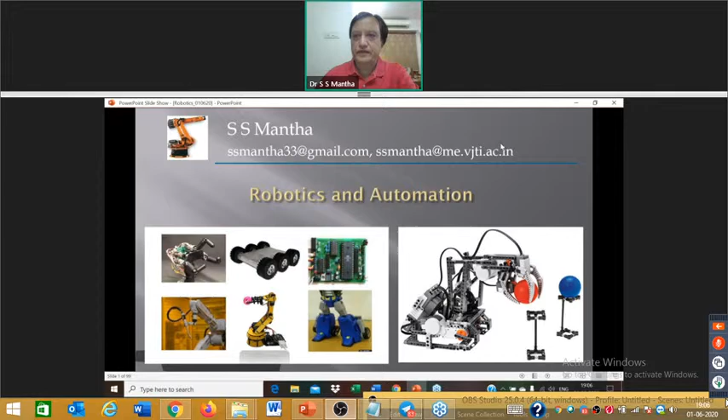What I'll do is take you through a session on robotics to try and understand what the subject is about. Today, almost everybody speaks about robotics, AI, and so on. In today's world, almost every application seems to be talking about some kind of automation. Within the industry space, automation is a generic terminology used, and robotics becomes a very significant part of today's manufacturing activities. Though I have said robotics is in reference to manufacturing, it has several other areas of application. In fact, in almost every single area you can think of, robotics has its place.

Now, what I'll be doing in this session is create a preamble to automation in order to really understand what robotics is all about. So we need to understand a little bit of what automation is. Then I'll take you through robotics, talk very briefly about how a robot is understood in terms of motion, in terms of forces, and so on, which we call kinematics and dynamics. Then I have something to inform you about control systems, which actually makes the robot do things we see in real time. And to do that, it uses several actuators and several sensors. Sensors sense an event, give a signal to the actuators, they start moving, the control systems take over, and we have a robot functioning. Subsequent to that, I'll take you through a little bit of smart robotics and mechatronics, flexible manufacturing systems, and some applications.

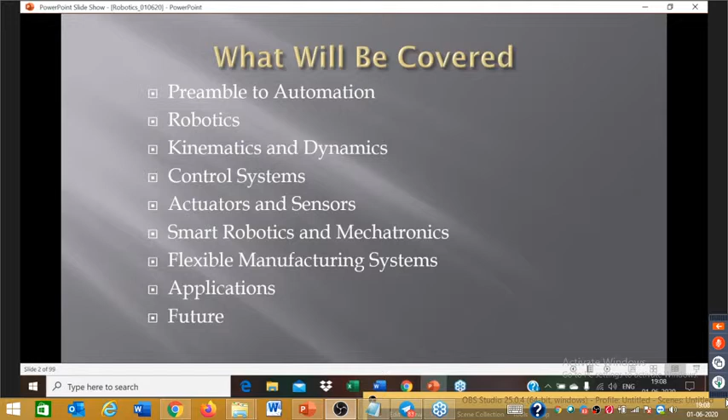So when I talk about preamble to automation, at the central part, there are production system facilities. There's product design, there's manufacturing planning, there's manufacturing control, the business functions, and all these become functional with customer orders. That's a typical manufacturing area or manufacturing space.

Now, when you come to factory operations, you deal with design, manufacturing planning, manufacturing control, and the business functions. And on the periphery, you have computer-aided design, computer-aided manufacturing, computer-aided business systems, and you also have cost estimations, part planning, numerical control, and so on.

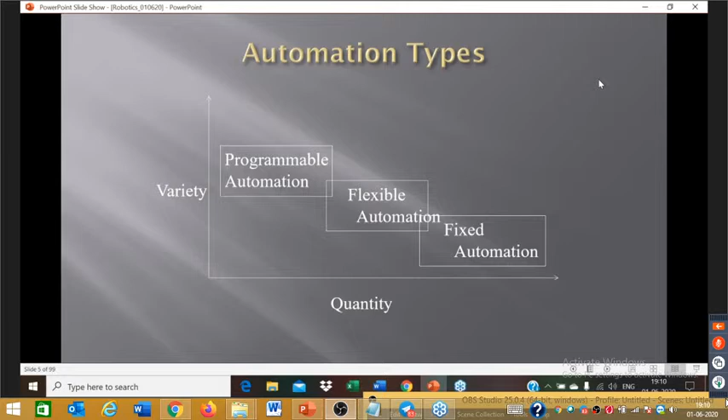Now, when we really look at the basic automation, there are three sub-areas: you have fixed automation, programmable automation, and flexible automation. These depend on the quantity you produce and the variety you have in production. When we look at fixed automation, obviously it has very high production rate. Because it has inflexible design, the variety will be very small. And between the three, fixed automation costs the least.

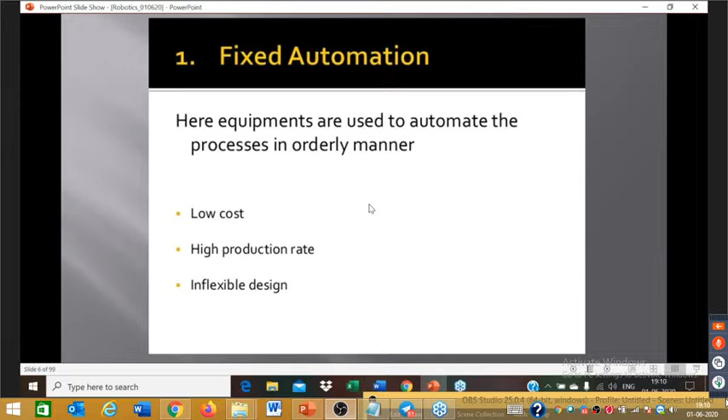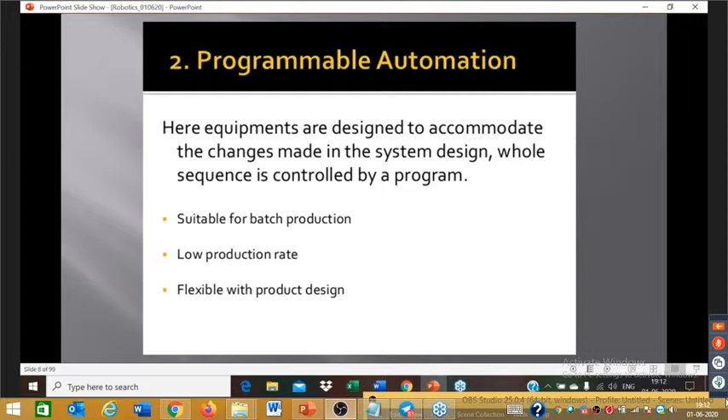Now we look at programmable automation. Here, equipment is designed to accommodate changes made in the system design. This is useful, meaning it has some capability of programming and changing the sequence of automation from fixed to something more flexible. So this is useful for batch production. It also has low production rates and is flexible with product design, meaning you can change the products and the design using programmable controllers and so on. This is a programmable automation controller. There are several kits available in the market which you program to get a certain sequence of events, giving you programmability into automation.

So there is a significant growth that is forecast for up to 2024.

The third is flexible automation. Here we have medium production rate, continuous production with variable design, which means you can keep changing the designs. A high amount of flexibility is available, but the cost factor is also very high. This is the place where you have a lot of robots and robotics and several other automation devices. That is how you get the requisite flexibility.

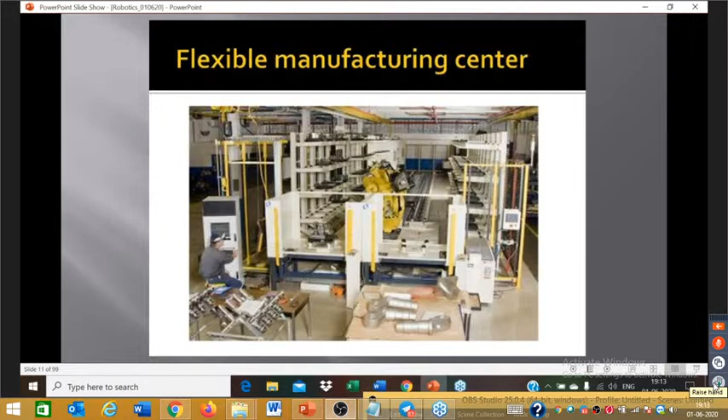Now we are looking at a flexible manufacturing center, which has several robots and so on. This is basically a continuous plant where different operations are carried out by different robots designed to do different activities or different sequence of events.

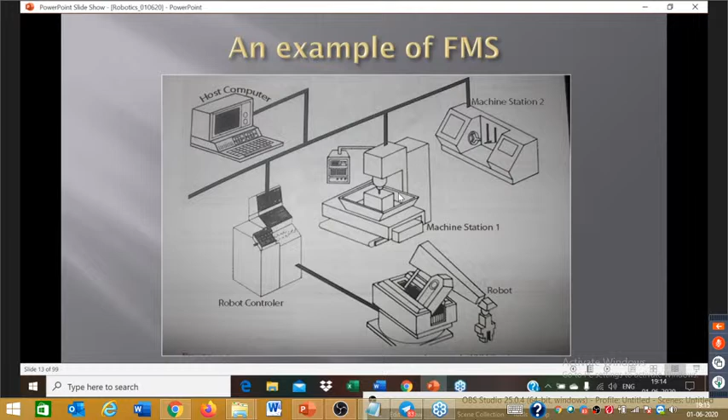So you have a fairly great amount of flexibility built into the product variety, and fairly large production volumes, but this is all dependent on the kind of costing that would be there. So this is how a flexible manufacturing system appears: there is a robo, a robo controller, and a host computer. There is machine station 1, machine station 2, and machine station n. There can be n number of machine stations.

Now, having looked at the preamble for automation and looked at robotics or robos, which are used in a typical manufacturing environment, we look at what actually a robo is.

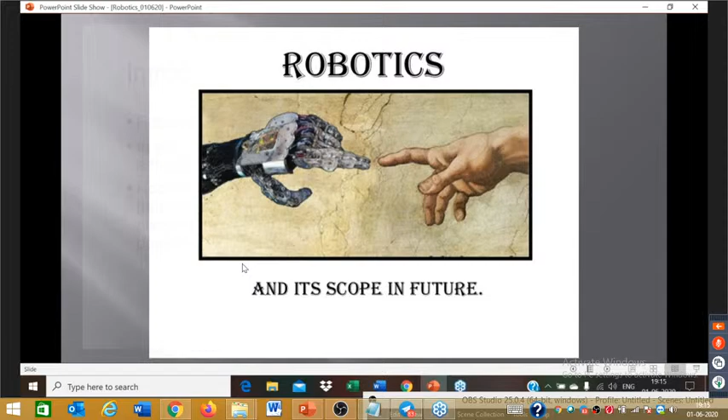We probably believe that a robo is a machine that looks and behaves like a human being, but they are actually defined as man-made mechanical systems where a certain amount of intelligence is built into them, some programmability is built into them, and all this is done through a set of sensors, actuators, and so on. We'll look at all of them in a little time from now.

So robotics is the science of designing or building an application of robos. Simply, robotics is the study of robos.

They are used when speed is necessary and can work in hazardous, dangerous temperatures, like, for example, plasma welding or plasma cutting, or maybe in a nuclear reactor where fuel rods have to be changed, replaced, and so on. They can also do repetitive work which is extremely difficult in terms of human adaptability, and they work with accuracy that is absolutely repeatable over several cycles.

Now, there is some history to robotics. The Czech playwright Karel Čapek first used the word robo, which means forced labor, like a slave, working like a slave. And the term robotics was coined from robo and used in Runaround, a short story published in 1942 by Isaac Asimov.

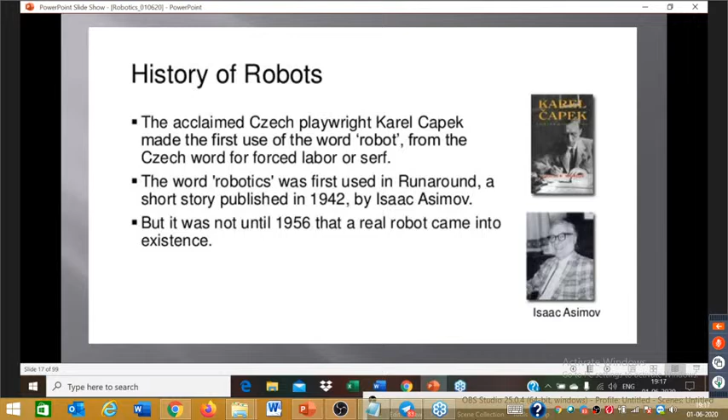And the first robo was actually built in 1956 and was done by General Motors. There are 3 laws of robotics.

There is the 0th law: a robo may not injure humanity. So when we use robots, it should not injure human beings. The first law: a robo may not injure a human being, or through inaction allow a human being to come to harm, unless this would violate a higher order law. The second law: a robo must obey orders given to it by human beings, except where such orders would conflict with the higher order laws. And the third law: it must protect its own existence, as long as such protection does not conflict with the higher order laws.

Now, the entire field of robotics depends on these laws of robotics. The first robo was created by Unimation. Joseph Engelberger, who was the first person to create a robo, is very rightly called the father of robotics.

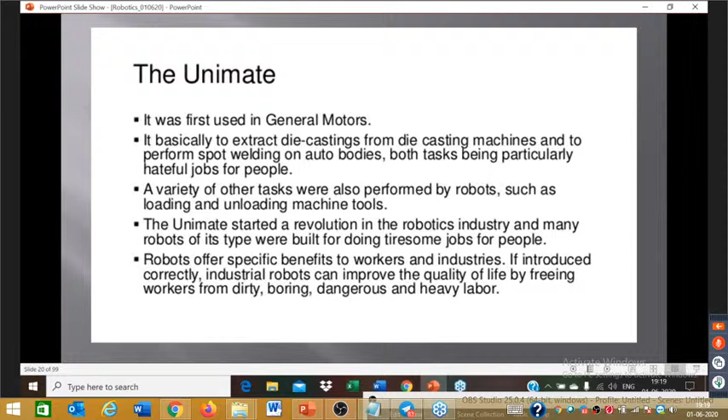They are also used in several other areas for assembly of factory parts, handling, assembly, painting, surveillance, security, bomb disposal. Several robots are used in mine sweeping applications and for grass cutting, nursing - anything you talk about, an automated device can be designed to do that function.

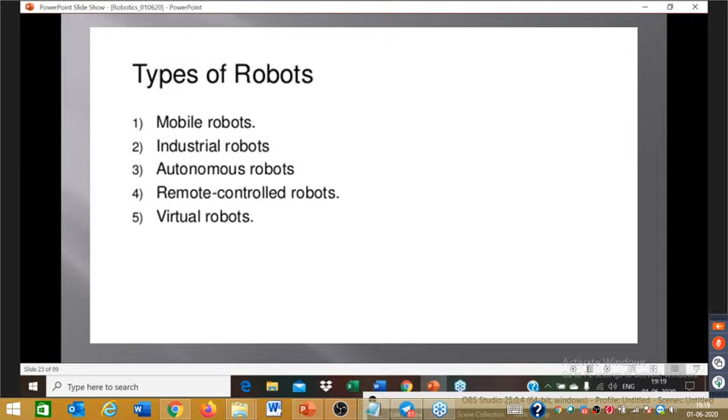So within robots, you have mobile robots, industrial robots, autonomous robots, remote control robots, and virtual robots. We'll see a little bit of each one of them, and we'll also look at some details of where it makes sense.

Now, mobile robots are obviously those which are able to move. Usually they are of two types: one is a rolling robo, and the other is a walking robo. A rolling robo will have wheels and is controlled, and walking robots have robots on legs. So you have motion created by either rolling or through walking.

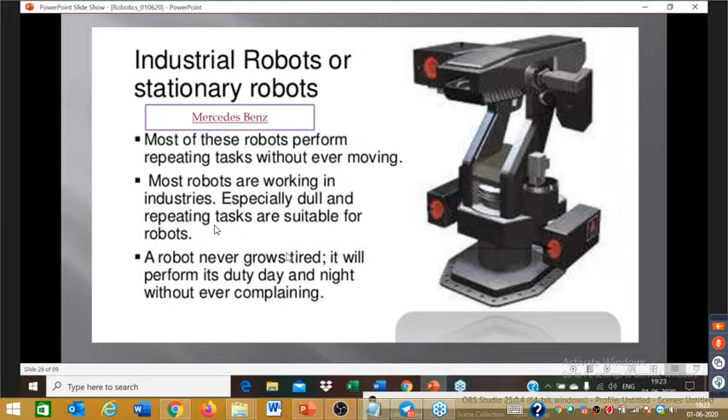So you have seen the robots used in the Mercedes-Benz factory. In fact, every 10 minutes, they assemble one Mercedes vehicle. That's the kind of speeds that are possible. Most of these robots perform repeated tasks, and of course they don't grow tired, and they don't have the labor laws applicable to them, things like that.

So now, having looked at automation as a preamble and having looked at some of the application areas through a video, we'll now look at what actually is a robot. It obviously has a manipulator, or robo, the main body of the robot. That has links, joints, and so on, which are the structural elements of the robot.

Now, you can imagine your hand. There is a shoulder joint, an elbow joint, a wrist joint, and beyond the wrist there is a hand. You will also appreciate that without the hand, whatever flexibility you have at the shoulder or degrees of freedom at the elbow is of no use. So there is an end effector, the hand, a device which manipulates the objects and is a very important part of a robot.

Now, there is energy required to make these joints move, translate, rotate, and so on. So therefore you will need actuators. Actuators are like muscles of the manipulators. In a human hand, if I want to lift a bucket of 10 liters, 5 liters, or maybe 50 liters, the muscle power comes into operation. Therefore, in a robo as well, if I have to manipulate objects of different weights, I'll need actuators, which are typically the muscle of the manipulators. They can be pneumatic, hydraulic, DC motors, servo motors, or stepper motors - so either hydraulic, pneumatic, or electric. Obviously, each one has its own plus and minus, its own advantages and limitations.

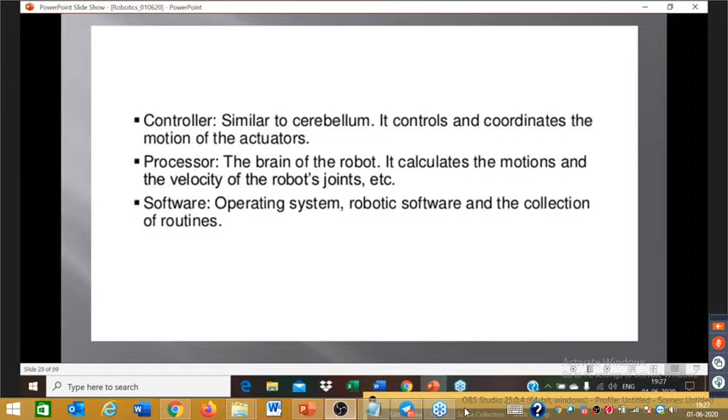Now, obviously, when you talk of a robo, you have to describe what is degree of freedom. The number of independent coordinates you require to define motion is also the degree of freedom. So, for example, one joint is one degree of freedom. If you have 10 joints, you'll have 10 degrees of freedom. In a simple robo, you have 3 degrees of freedom in the 3 mutually perpendicular directions, X, Y, and Z.

A robo can technically have any number of degrees of freedom. Here I'll give you a small point to think about. Maybe at the end of the lecture, you can tell me how many degrees of freedom a human hand has.

Now, the human hand, the end effector, can also have 3 motions: pitch, roll, and yaw. These are the 3 motions which happen about the 3 perpendicular axes.

The terminology is similar to a ship in water. A ship can rotate about the vertical axis, and it can rotate about the other 2 perpendicular axes, the horizontal axis and the one perpendicular to that. So the ship is either rolling about a horizontal axis, pitching about the other perpendicular axis in the horizontal plane, and yawing about the vertical axis.

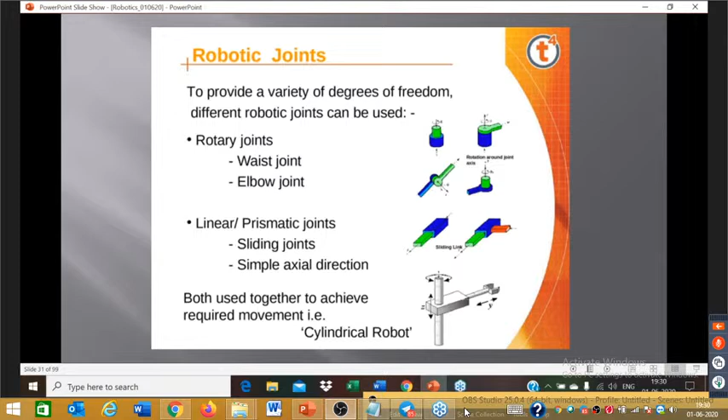So there are prismatic joints, rotary joints at the waist, at the elbow, and linear sliding joints about the axial direction, and so on. A cylindrical robo will have both rotary as well as linear motion. For example, one rotary and two linear joints make a cylindrical robo.

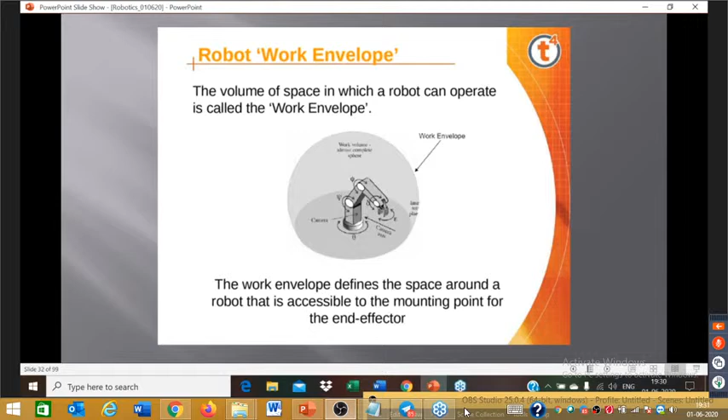Now we need to really look at what is work envelope when we talk about robos. At the end effector, you notionally put a point, and as the robo moves in all its possible positions, you draw the locus of that point on the end effector, and you create a work envelope. The work envelope is very necessary because it defines the extent to which the manipulator can be manipulated.

There are many other dimensions to this which I may not talk to you at this point of time because of paucity of time. You can actually relate them back to a human body, a human hand, and talk about the work volume and work envelope and so on.

There are also points, like for example on a human hand, on a finger, assume there is a point, and you try and draw the locus of the point by moving your hand in all possible directions. The volume that you create is the work volume of the human being.

Now, having said that, there is another question: is it possible that you can reach any point within the work volume by the end effector? The answer is no, and those points are actually the singularities in the system.

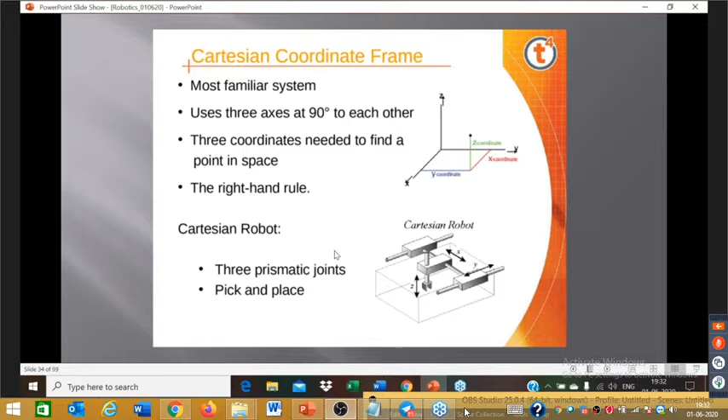There is a classification possible: Cartesian, cylindrical, spherical, depending on the coordinate systems that we are using. The most familiar is Cartesian, where three linear motions about x, y, z happen, and they need three prismatic joints, and most of the time they're used as pick and place robos. So this is how Cartesian robo applications happen.

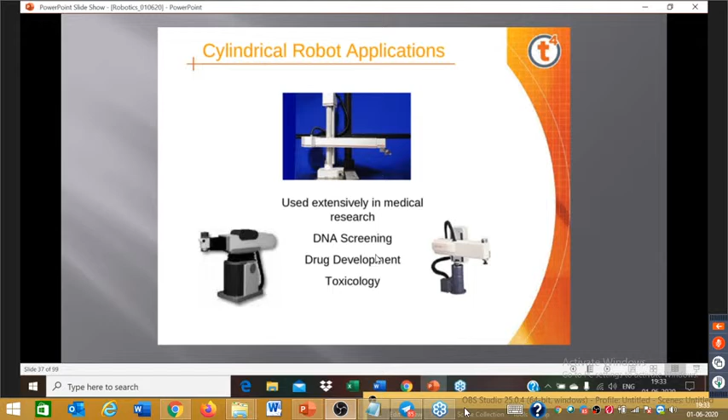Now we have a cylindrical coordinate frame. Obviously, there is one rotation and two prismatic joints, so think about what the work volume would be here. These cylindrical robo applications are used extensively in DNA screening, drug development, toxicology, and so on.

We also have spherical or polar coordinate systems, and they have spot, gas, and arc welding applications, reaching horizontal or inclined tunnels, etc.

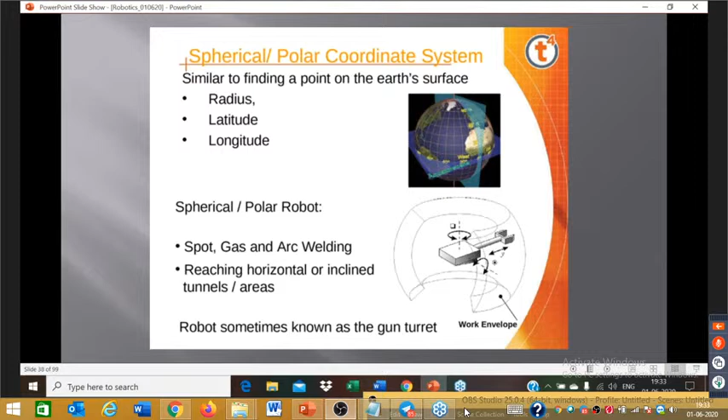Much more flexibility is available. The robo is also known as the gun turret, where in military vehicles there is a turret mounted on the vehicle which goes around shooting in the direction it is pointing. So these are all spherical polar coordinate systems, used extensively in the car manufacturing industry and welding.

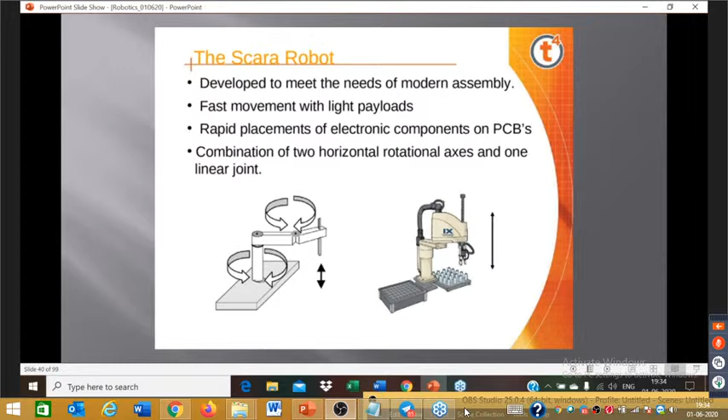The next one, which is extremely important, is a SCARA robot, selective compliance assembly robot arm. This was developed mostly for planar operations on a plane, fast movement with light payloads, rapid placements. Typically PCB assemblies, PCB welding can all be done through this. So these are Scara applications, mostly on a plane.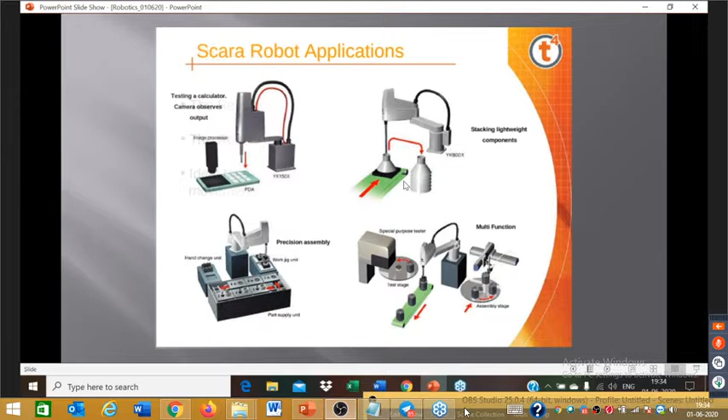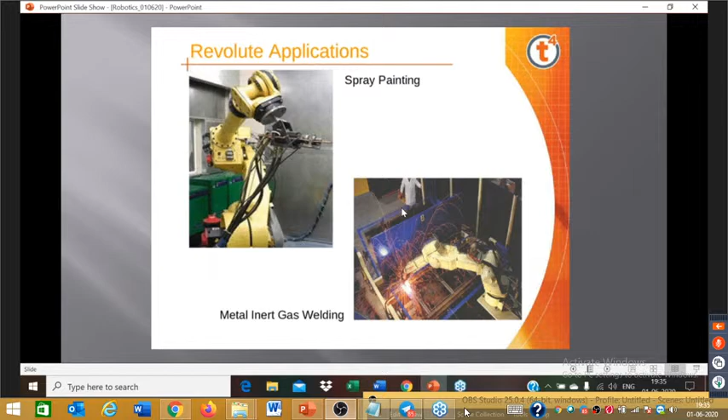Then we have the Revolute Robo or Puma, a company again. It resembles a human arm, the robo rotates much like the human waist. This is ideal for spray painting, which is a very hazardous application. The paint stays in the air and you breathe it, and people can get medical problems like asthma. So robos are used for spray painting and welding, which is also very hazardous, and they mimic human motion. These are Revolute applications: spray painting, metal inert gas MIG welding, TIG welding, all done using these robos.

Now we come to humanoid robo. This was developed for recreational and entertainment value, but today it has much more value in addressing household chores and acting as aid for elderly people. It can open a refrigerator door, or bring out a glass, things like that.

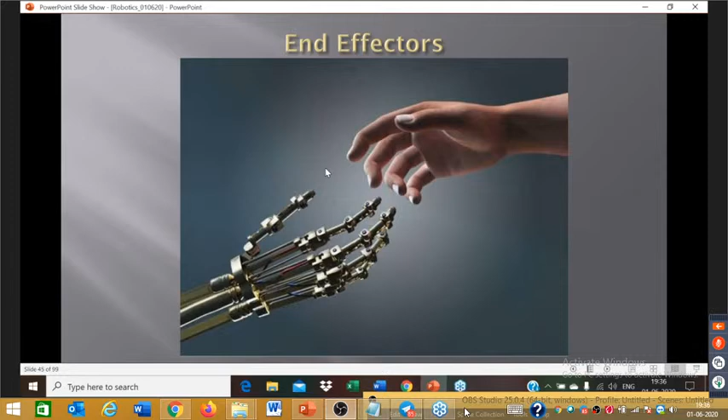Like I said in the beginning, it's extremely important to know that without a hand, without the fingers, the portion below the wrist has really no meaning, no value. So the fingers, the portion below the wrist, is extremely important. What you see here is a robotic hand, which is highly evolved. But in a simplistic sense, you have a hand attached to the end of the robo, called an end effector. This is the hand, used for grasping, drilling, painting, welding, anything you think about.

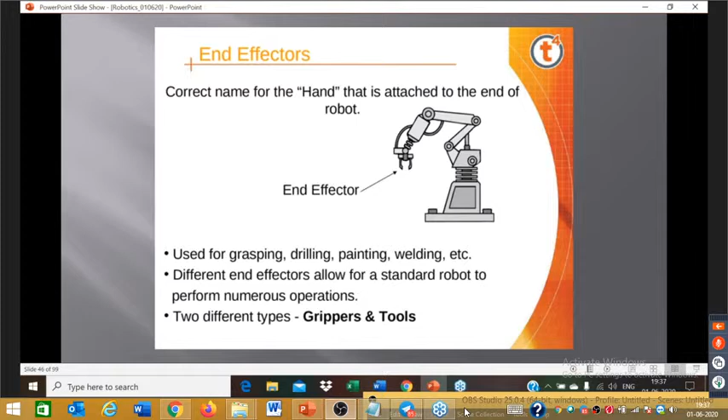Ideally, if I change the application, the end effector would change. Relating it back to a human being, you do a variety of activities with a single hand, and you have two of them. In fact, for a human being you have 2 eyes, 2 ears, everything has redundancy built into the system. But if you want to really automate that, it's extremely difficult. The hand is also extremely dexterous, and that's a property which is extremely difficult to build into a mechanical system. But today we have technology to do all that.

End effectors can be tools, they can be grippers: mechanical, magnetic, pneumatic, hydraulic, electro-pneumatic, electro-hydraulic, pneumo-hydraulic, anything is possible. 2-fingered is most common; we have 5 fingers for a human being, but if you really think about it, most jobs you can do with 2 fingers. A multi-finger end effector is also available. It applies force that causes enough friction between objects. In fact, without friction you can't even walk, you can't ride.

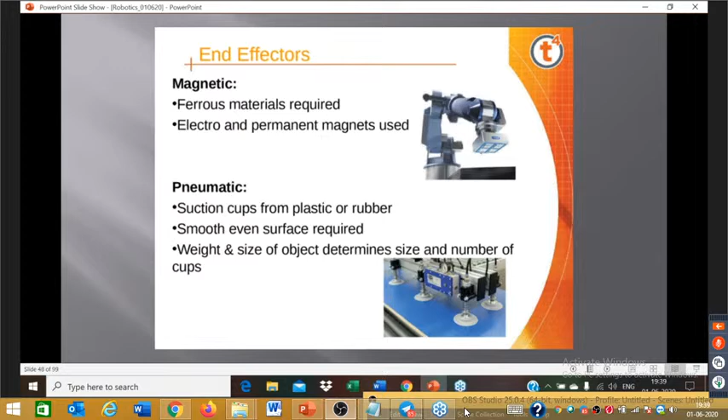A mechanical system needs friction to hold objects between end effectors. Some objects may be delicate or brittle, but there are force sensors which take care of those kinds of events. You can have pneumatic effectors, suction cups—if you have a flat plate on the floor, you can suck it up, things like that. So depending on the application, you have to design what kind of end effector can do the job.

Now, having looked at some basics of what a robo would have, you all must have also seen movies like Jurassic Park and so on. So this is probably a very de-glamorized approach to robotics. When I say it has joints, it has links, it is based on a Cartesian coordinate system, or is a Scara based system, and things like that—that's what it is. We can build more complex systems, but you begin here.

In order to understand all this, the motions, the forces, and things like that, you need to really look at what is kinematics and what is dynamics. I'm not going to go through the detailing of this, but very simply put, the kinematic model studies the motion of the robot regardless of force and torque.

Don't talk about force, don't talk about torque, just talk about the motion - that is kinematics. You use Denavit-Hartenberg notations for this. It's very essential for describing an end effector position. Where will the end effector go? If I move the waist so much, the shoulder so much, the elbow so much, the wrist so much, where will my end effector be in reference to my initial position? That motion is defined by a kinematic model.

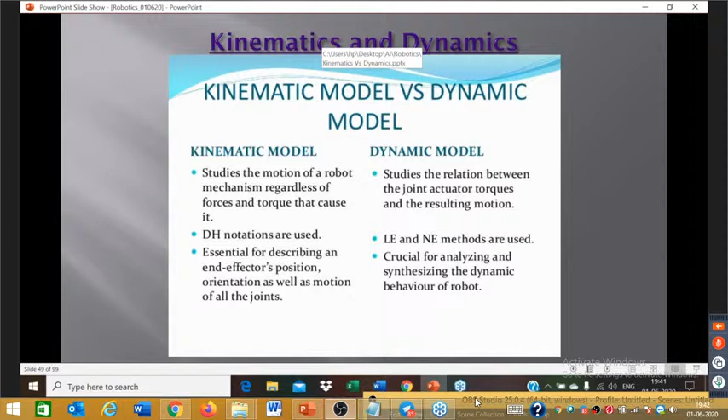So having looked at some basics and the preamble in which robotics work, now we look at some control systems - how do we control these actuators. I'll come back to actuators a little later. I have essentially three systems: an open loop control system, a closed loop control system, and an adaptive control system. Put simply, an open loop control system does not have feedback.

A closed loop control will measure the output and compare with what I require, finding out what the error is. That error is added to the input, and over the next cycle the error becomes smaller and smaller, and somewhere it may converge. In an adaptive system, every single element has a feedback loop, and therefore the convergence is much faster. We won't go into more of these systems at this point.

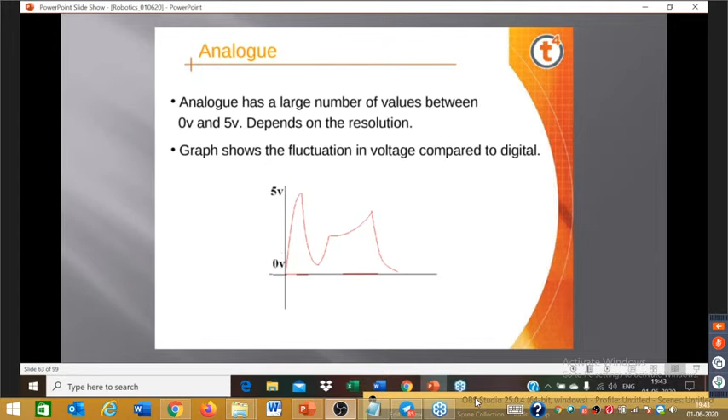There are various devices used. There are linear encoders used for measuring small displacements, and encoders used for rotational motion, and so on. There is also proportional control, differential control, and integral control, which are used to control the systems.

Beyond this, we have autonomous robots which are self-supporting - we are going into more complex systems now. They run programs that give them the opportunity to decide on the action to perform, and so on. So they work by themselves - that is autonomous.

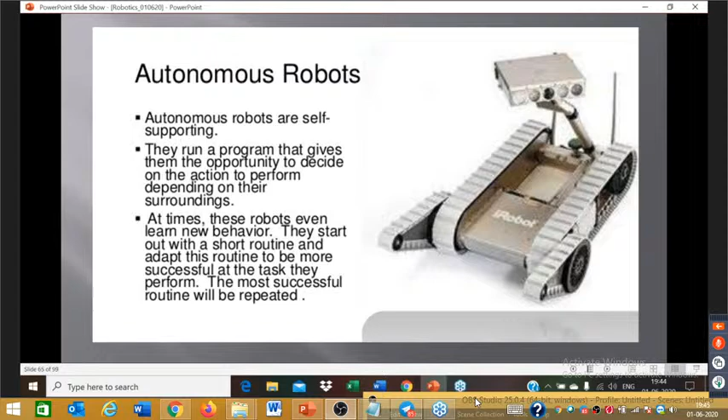Remote controlled robots handle very complex tasks - like you have a nuclear reactor, you can't go anywhere near because of radioactivity. So you have a robot inside the reactor separating the spent fuel, removing it from the reactor and replacing it with new fuel. When you want to do this, you have to have another robot outside the reactor, and you start moving that robot, which is outside the radioactivity zone. Whatever you do with that robot will be faithfully reflected inside the reactor. So these are teleoperated robots.

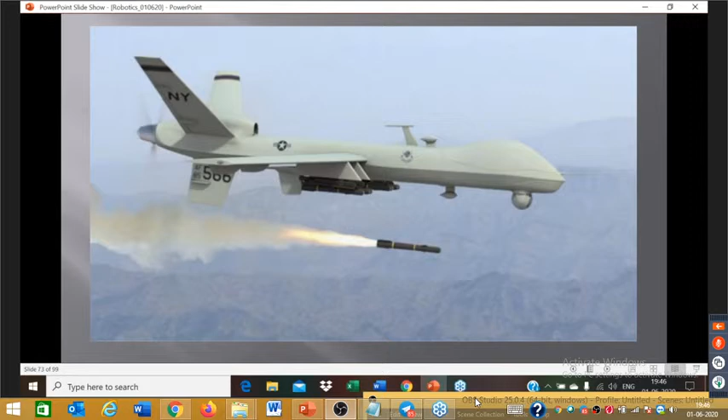Now I will take you to a little about sensors and actuators, because that's an extremely important part of robotics. This is actually from Hesheng Wang, a professor.

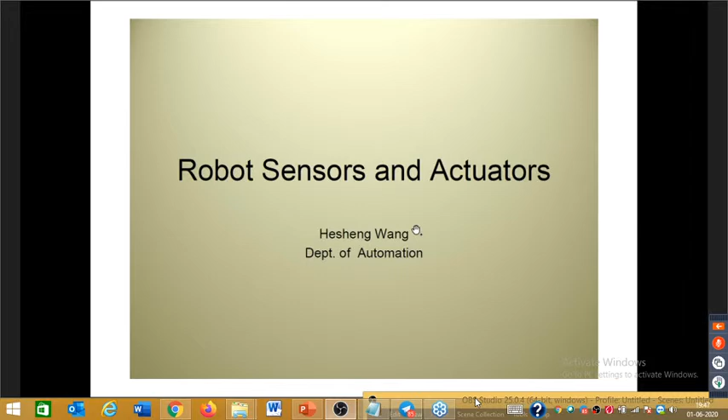What this tells you is about several sensors. Sensors, obviously, you need to measure parameters which you use to make decisions, depending on what the value of that measurement is about. So you have position, you can measure position, orientation, acceleration, distance, size, force, moment, temperature, luminance, weight - everything you can measure.

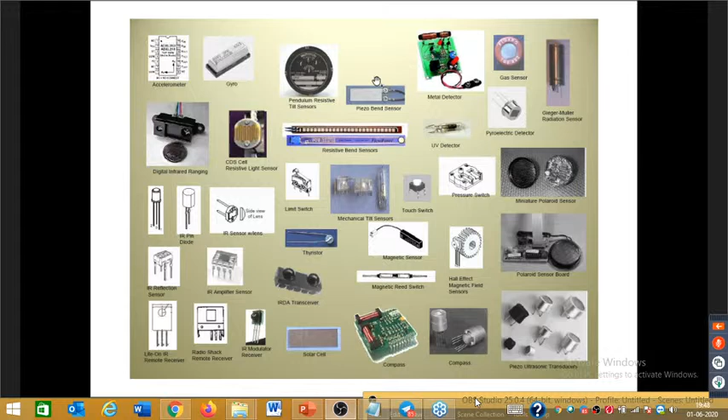So you have ultrasonic sensors and other sensors. This figure shows different sensors available which are used in robotics to measure different parameters. Each one has a different input-output relationship, different way of behavior, different technically defined parameters. So you need to choose the right sensor for the right application, and that is the crux of the problem.

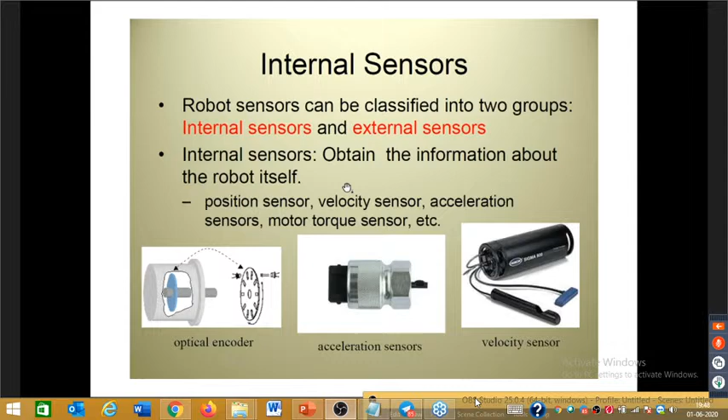There are internal sensors, optical encoders. There, like I said, angular motions, acceleration sensors, if you want to measure the acceleration and so on. If you want to measure the velocity, there are velocity sensors and so on.

External sensors include cameras, and range sensors in order to find out at what distance the object is. There are infrared sensors, laser range sensors, ultrasonic sensors, proximity sensors, photodiodes, force sensors, basically strain gauges, and so on.

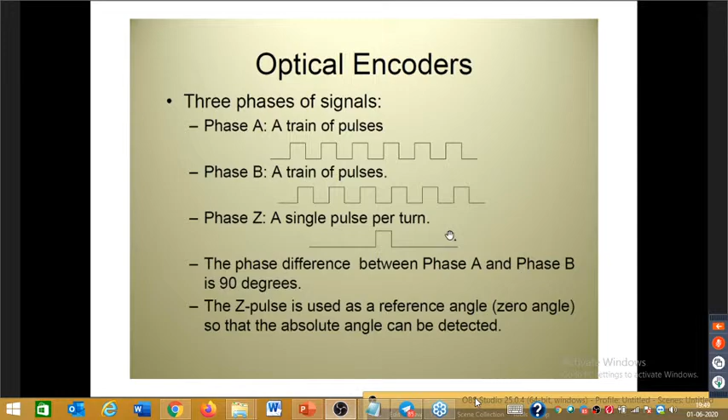So you can measure position. This is the optical encoder. This is the principle on which they function.

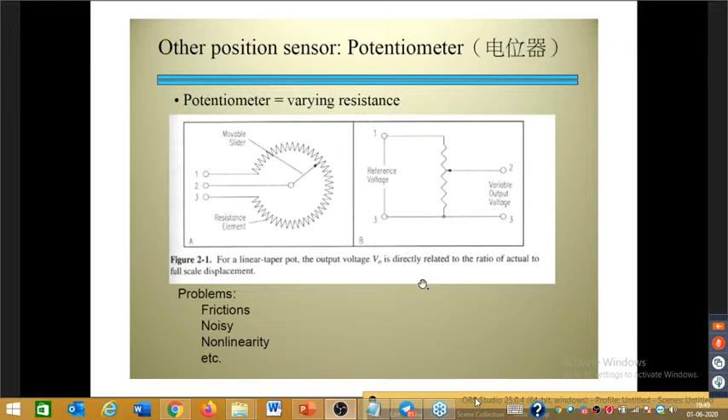And you have potentiometers with varying resistances as you change the distance, so you can measure the distance. Once you measure the distance, the first derivative will give you the velocity. The second derivative will give you the acceleration.

We also have inertial sensors, gyroscopes. A gyroscope is, if you really want to understand this, if you have motion about two perpendicular directions, a motion can happen around the third perpendicular direction, and that motion will have to be countered if the body has to be stable. In a two-wheeler, the human being himself functions as a gyroscope. In a four-wheeler, you don't need a gyroscope because the road is not flexible. But in a ship or an aeroplane, you need a gyroscope, and many of these things are used in robotics as well. So there are several applications of gyroscopes.

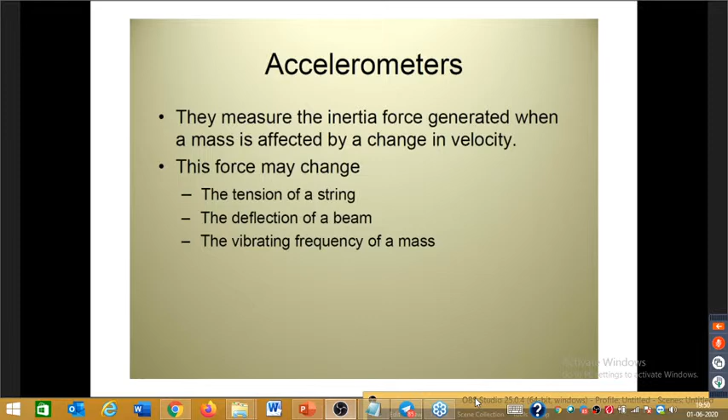Then you measure accelerometers, you measure tension of a string, you measure deflection of a beam, you measure vibrating frequency of a mass, and an accelerometer. You can actually use accelerometers in several applications. You can even measure earthquake intensities and things like that.

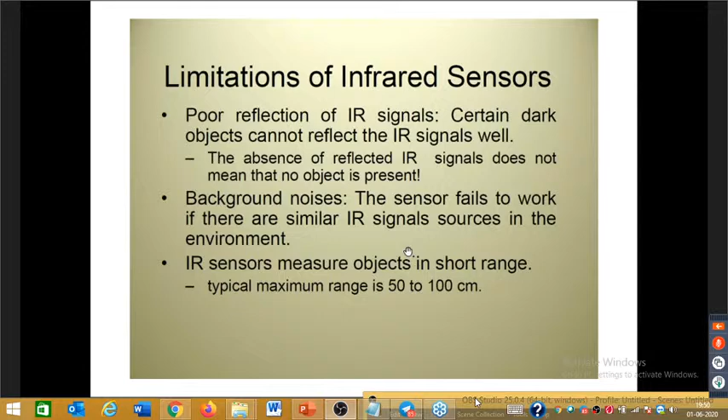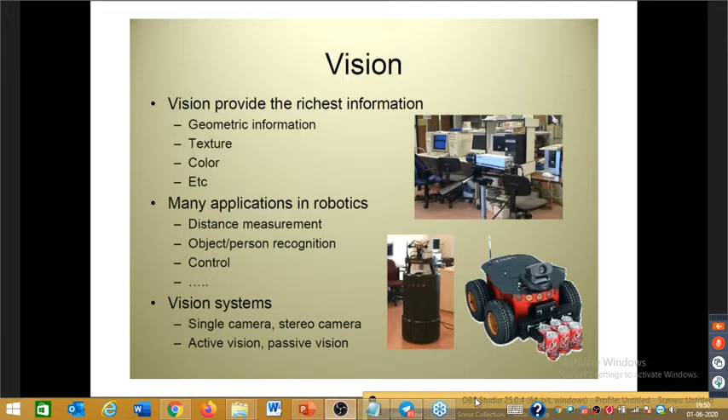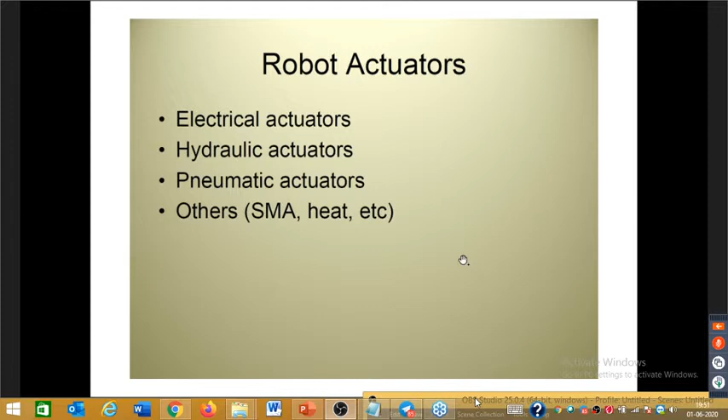Now we come to robot actuators. Here what I have is, again, like I said, you have electrical actuators, hydraulic actuators, pneumatic actuators, and so on.

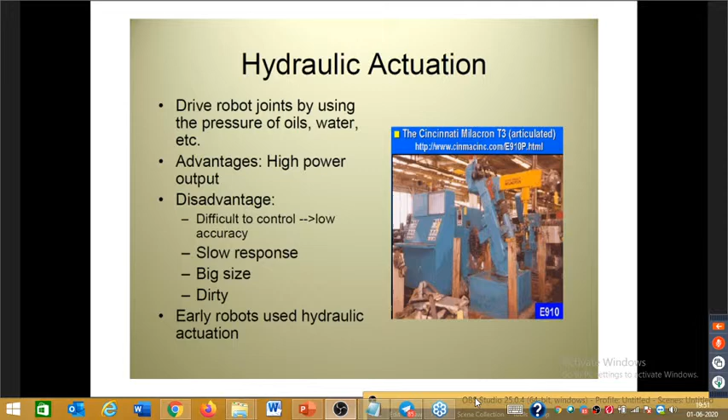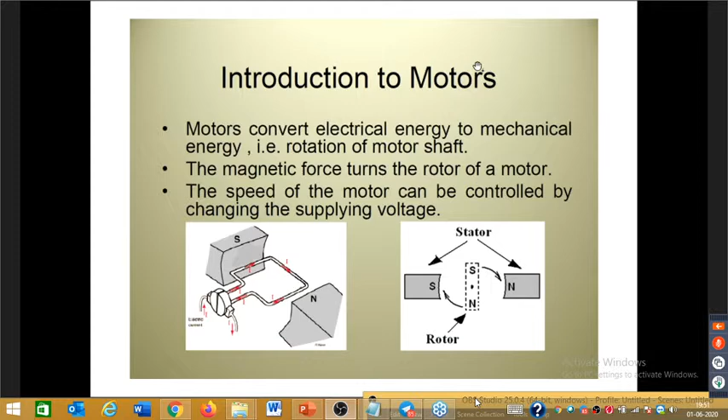Now I will go back to smart robotics and mechatronics. You have seen a little bit of what is happening in most of robotics. Actuators are very important to give the motive power. The sensors are important to measure that motion, displacement, velocities, accelerations, and some of the forces as well.

So there are medical robotics which function at the nanoscale. Nanoscale is 10⁻⁹ of a meter. Here I have 2-3 examples of it. When a tiny robot is implanted into our bloodstream, it detects the cause of the fever, travels to the appropriate system, and provides a dose of medication. These are all very small robots, which are called nano robots.

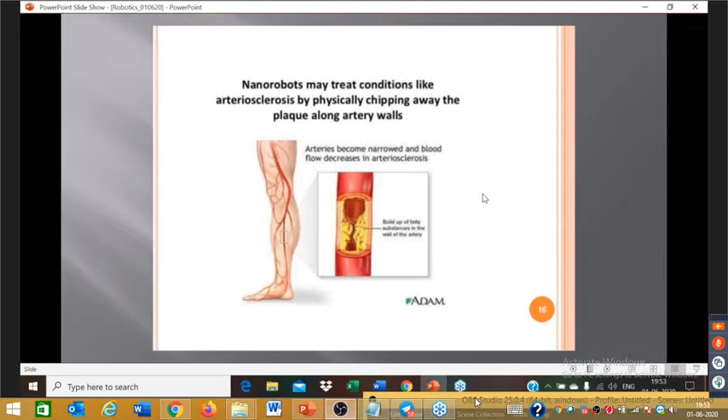They also treat conditions like arteriosclerosis, physically chipping away the plaque along artery walls. And there are also nanorobotics which carry small ultrasonic signal generators to deliver frequencies which directly attack kidney stones and break them. So this is the level of robotics in medicine, or medical robotics as we call them.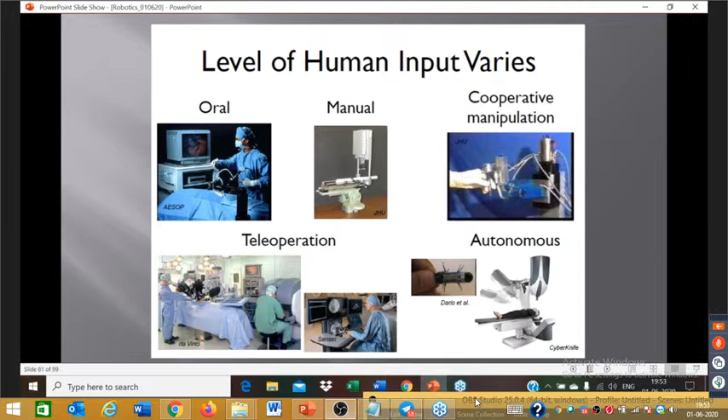Oral, manual, cooperative manipulators, teleoperation, autonomous - everything is used in medical robotics. We also have virtual robots.

These don't exist in real life. They are basically programs, building blocks of software, sitting inside a computer, but they can simulate real robots. Search engines use such kinds of robots. For example, if you go to Google and type any keyword, you get a reply back saying 0.23 seconds, and you get a whole lot of data.

And that is basically done by virtual robots and several other algorithms based on AI and so on.

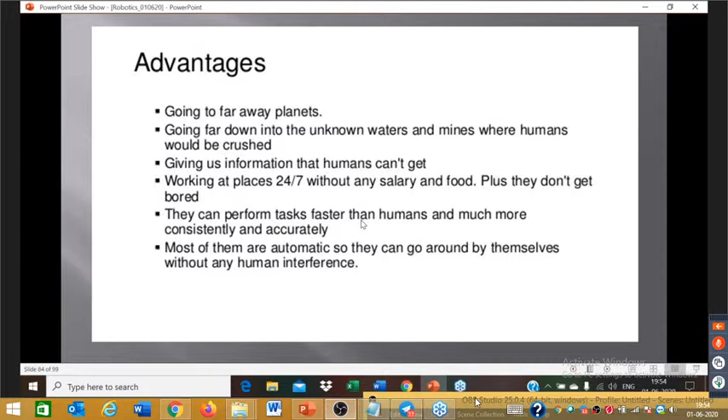Now, obviously, there are several advantages. You can go to planets, you can visit planets, you can go underwater, undersea, you can get information that humans can't get, work 24/7, perform much faster tasks that humans possibly cannot do, and many of them are very, very flexible.

And there are obviously some disadvantages as well. People can possibly lose jobs. It needs power, and it needs maintenance, and it needs a lot of money to buy and maintain a robot.

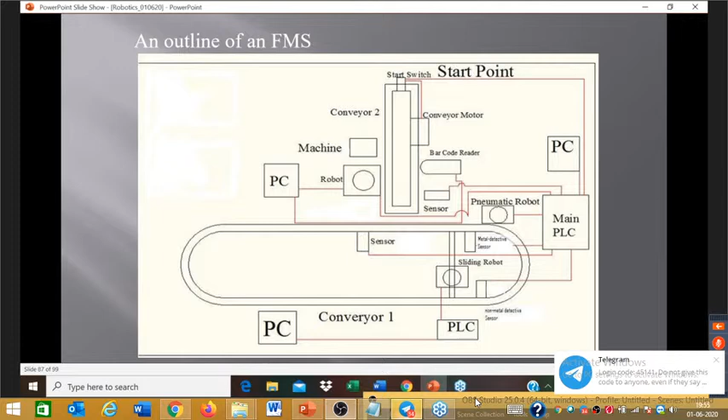Now, in a typical work environment, we have what we call flexible manufacturing systems, where typically robots are used, which I have actually shown you a video of - Mercedes-Benz, which I'll come back to again, is a flexible manufacturing system. They all typically look like this, and they are completely automated plants.

And today we are in the Industry 4.0 scenario. We are in a scene where either we compete and provide the quality that the global world seeks, or we are out of business. So therefore, these are some of the things which we really need to worry about now.

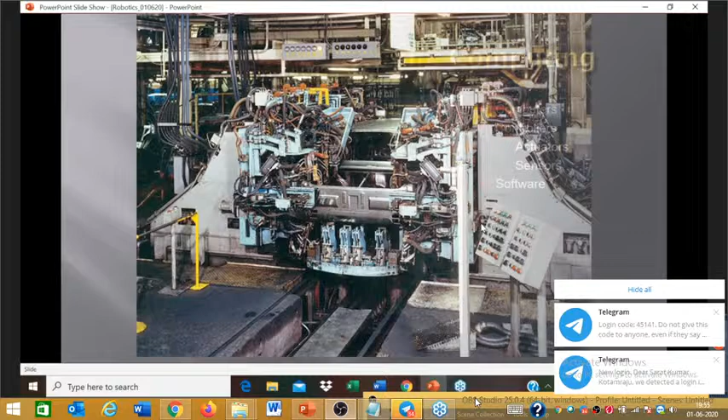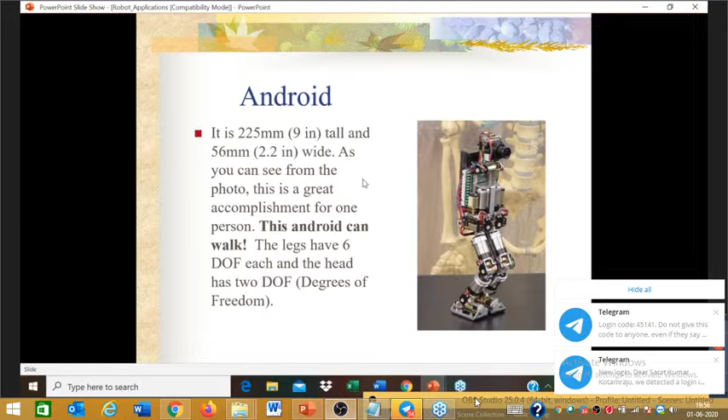Now, this is an android which is actually just 9 inches tall and 2.2 inches wide. And a great accomplishment for one person because the legs have 6 degrees of freedom and the head has 2 degrees of freedom. Now, in typical human terms, this is a very, very important breakthrough.

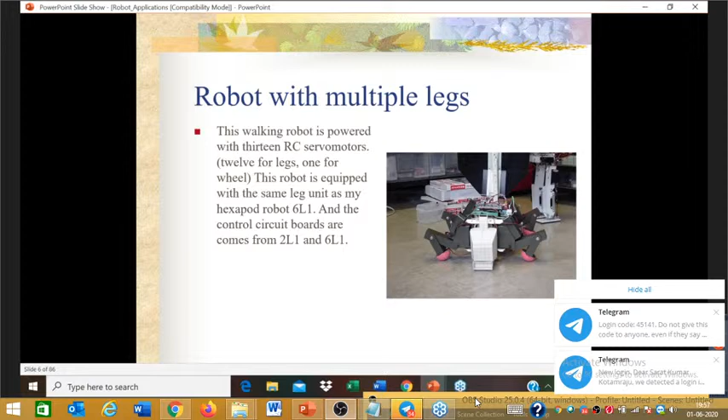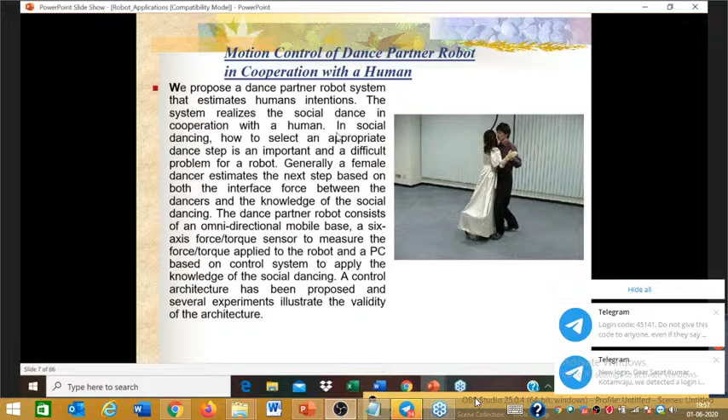Now here we have motion control of a dance partner robot in cooperation with a human being. Actually, you can do the gait analysis. You can find out how a human being walks, build that gait analysis into the robot, and the robot will actually start dancing like a human being dances.

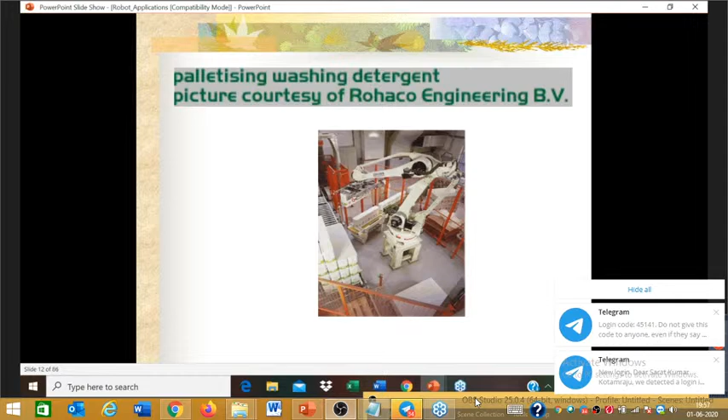This is a palletizer for the food industry where potatoes are packed or vegetables are packed in plastic bags and so on. This is a washing detergent washing machine robot and so on.

This is a painting robot. This is a TIG welding robot. This is a multifunctional robot for a die casting machine.

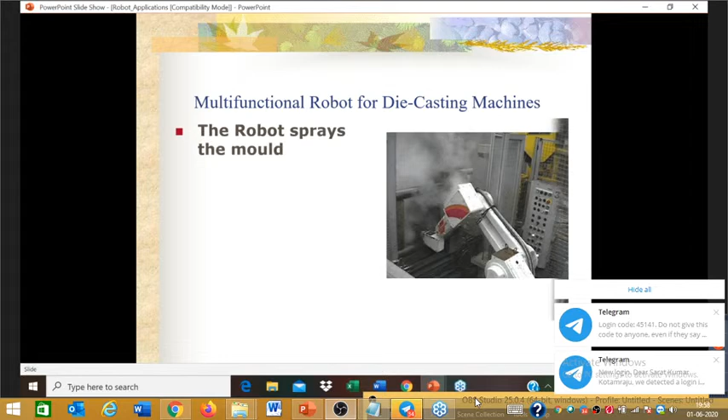Now, in order to demonstrate advances in research and stimulate science, we have the RoboCup soccer competition, which many of you may be aware of. And there are several goals set and different algorithms are built by people to solve the problems.

And in future, we also have Industry 4.0 coming in, and a lot of robotics which operates those kinds of machines. In fact, in Industry 4.0, machines talk to machines, humans talk to machines, machines talk to humans, and machines also can talk to machines. Now that is all possible only by a lot of artificial intelligence built into the systems.